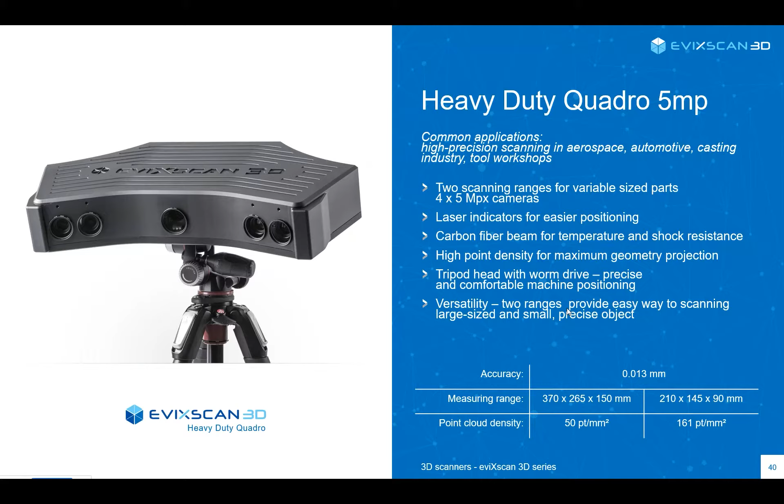So we can go from 370 by 265 by 150 to 210 by 145 by 90, with 50 points per millimeter squared and 161 points per millimeter squared. Really high density for high accuracy scanning, but also high field of view for fast scanning as well. A really versatile piece of equipment.

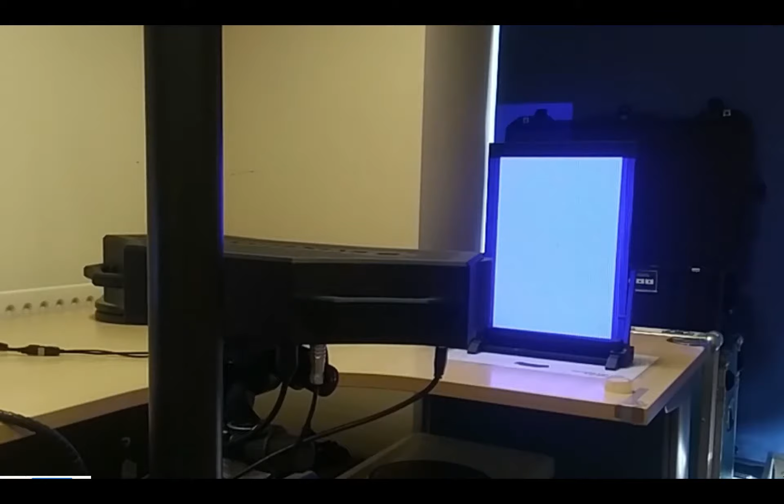Just having a quick look at the setup here, we're looking at the calibration process of the scanner, aligning this with the calibration plate. This is quite a simple process where the 2 laser lines are aligned and a number of shots are taken at different distances from the camera to create a measured bounding box within the environment. This allows for high accuracy scanning within the area of scanning. You can see here it's a very far field as well, so we have over 500 mil of distance from the scanner to the calibration window.

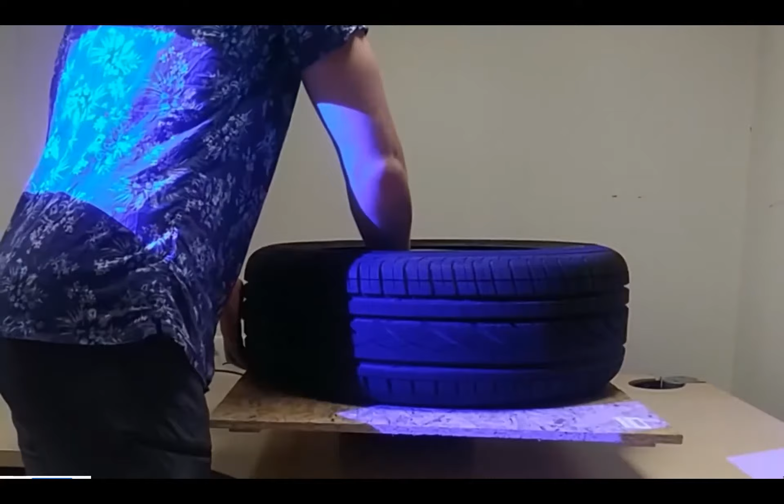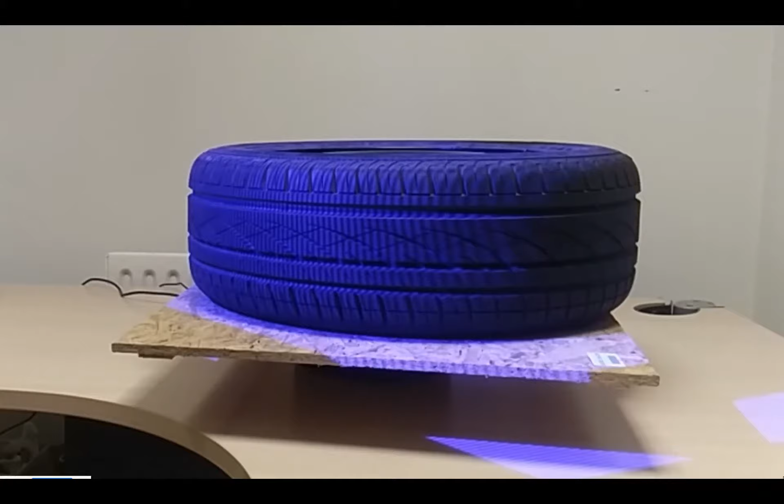So this is the object being scanned. We're scanning a Continental tire, as it's one of the main customers of the Evatronix scanners. We can see the tire mounted on the turntable on a board as a simple setup, and the scanning process taking place. It uses a fringe projection method of scanning where a barcode-like projection is done over the object, and that barcode is moved across. In this way, we can calibrate to capture all of the points in that field of view.

So once we have completed the scans, we need to take it into the Evatronix software. There are 10 steps on either side of the wheel here, so there'll be 2 different points of view taken into account, and then we will align that within the software and create a cohesive mesh.

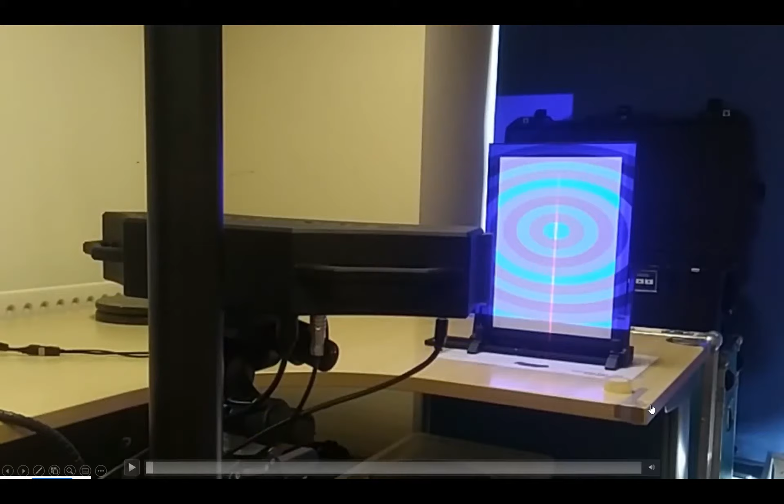Looking into the software now, we can see the 4 different tables for the different points of view that we used to scan this tire, and all the different meshes used to create this object. Each point of view, each snapshot, is aligned within the software using the aligning tools, and then we can convert this to a singular mesh.

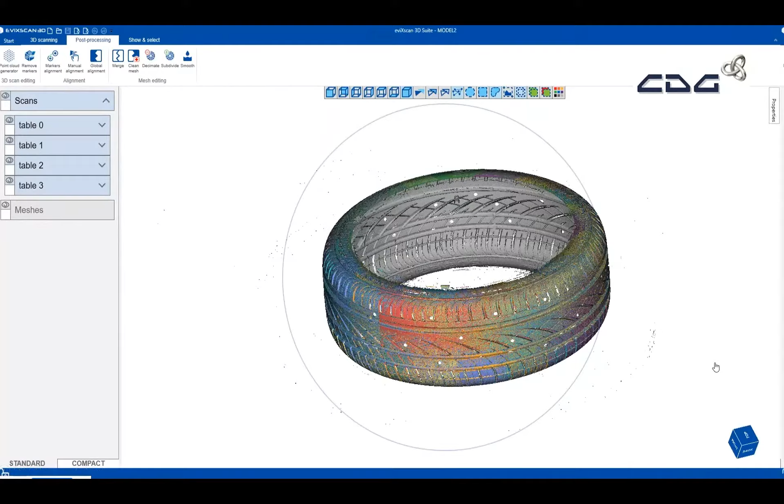Now looking at the merged object, we can see the high resolution of this scanner, having a look at the detail that we can capture within here. Really nice for reverse engineering of tire structures, tread analysis. All types of processes can be implemented with this type of setup.

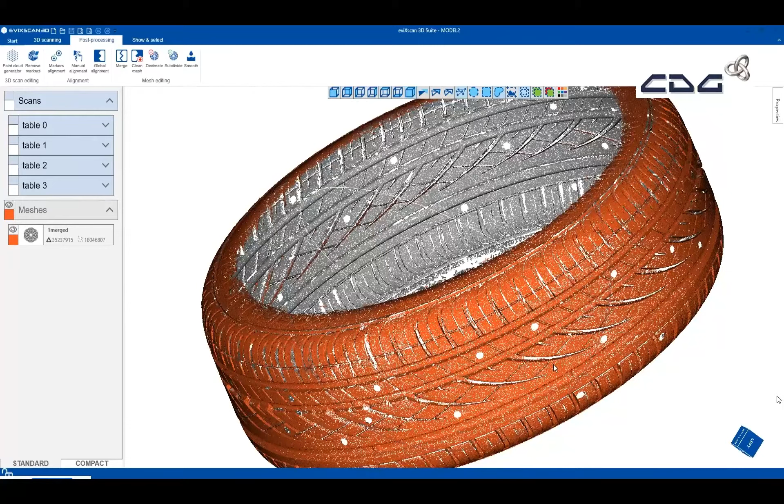Now looking at the eviXscan software, we can look at how we can automate this further, making it less user-based to set up, more automatic and easier to use.

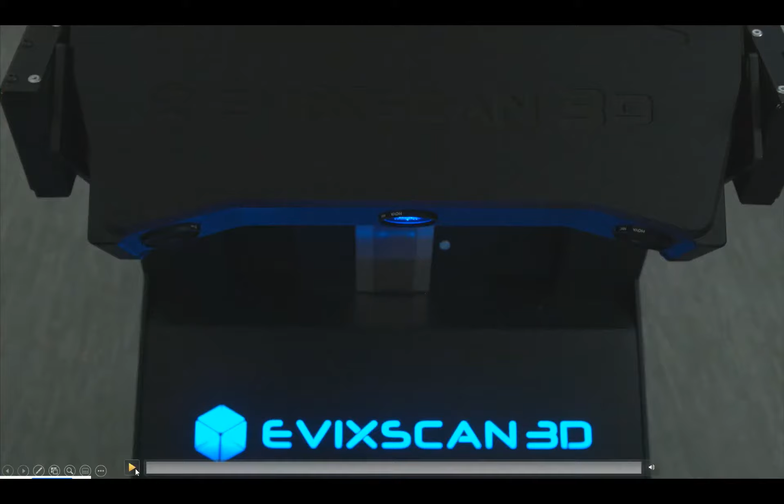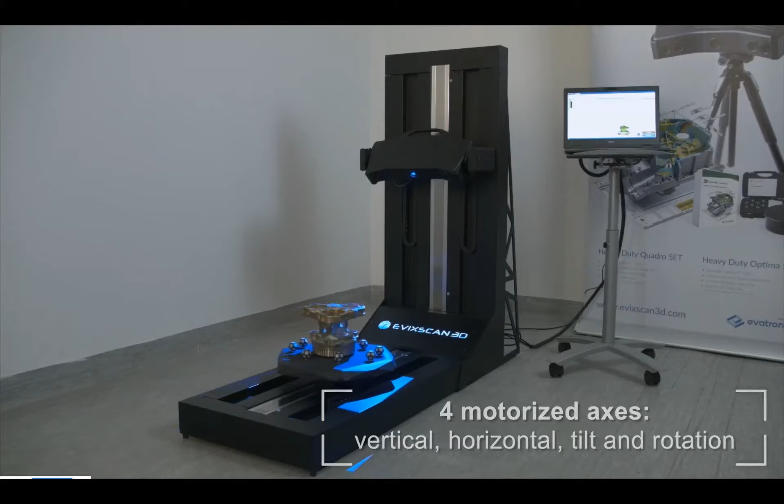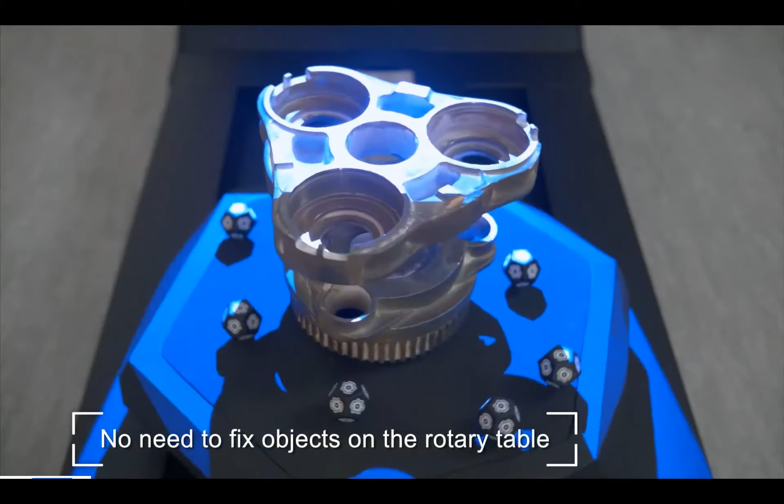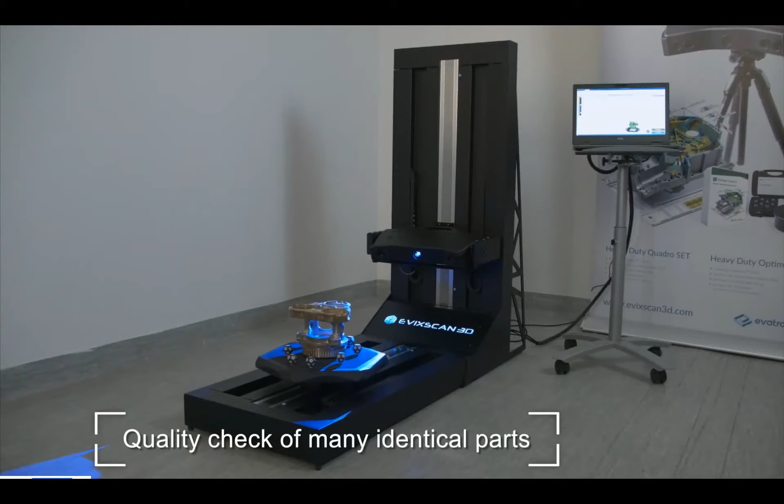Looking at a quick video demonstration here, we can see the Evatronix scanner setup, which uses a 4-axis setup connected to a laptop. The part is placed onto the turntable. We have auto calibration where we can place the calibration plate onto the turntable as well, making it a much faster process for calibration. We scan the part very easily at multiple different views, capturing as much data as we can from the part without human interaction, very much automating the process for quick and easy capture of the data. You can see here the software aligning the scans automatically whilst using this setup.

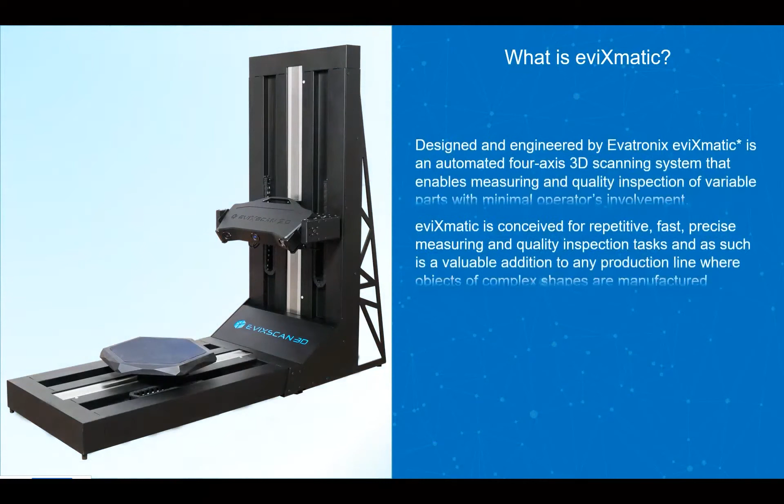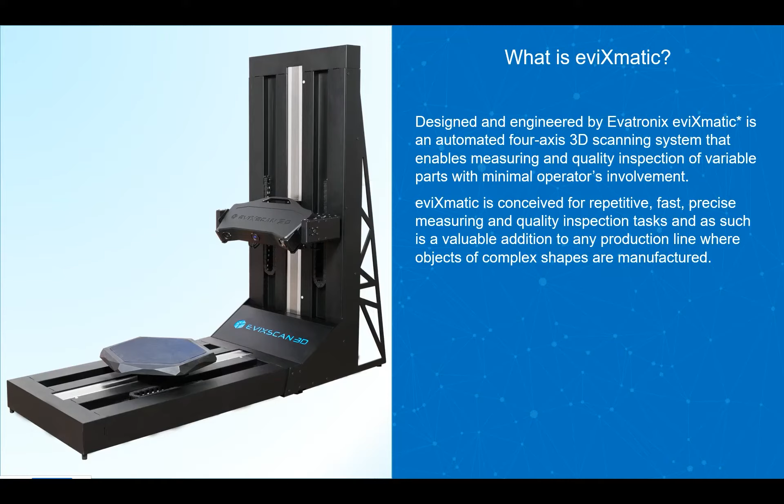So what is the eviXmatic? It is designed by Evatronix, a proprietary piece of hardware. It's a 4-axis 3D scanning system that enables measurement and quality inspection of variable parts with minimal operator involvement. It's very good for repeatability, it's fast, it's precise. It makes the inspection task much easier for a user to do, and it really makes the scanner work for you that much better.

It can be set up with the Quadro or the Optima. So in both ways, we can use the different fields of view, but also possibly use the Optima as a cost-saving exercise as well.

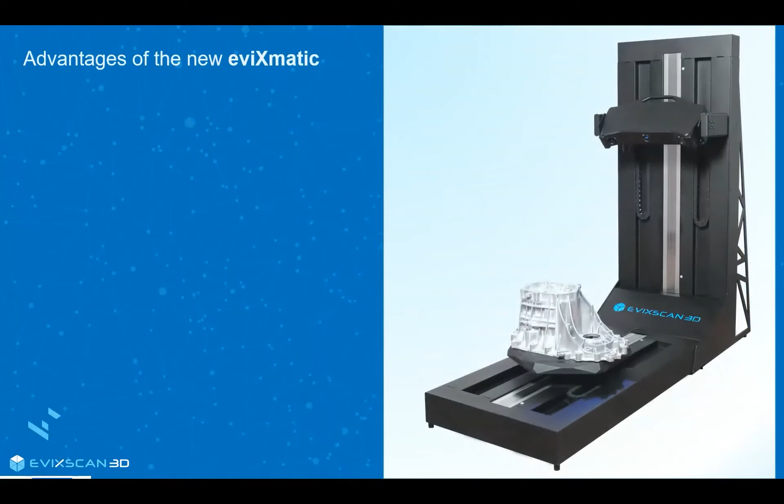The advantages of the eviXmatic are auto-calibration, which makes it a faster process for calibrating the scanner, making sure your measurements are accurate. There's also an automated scanning procedure, so setting up a procedure for scanning the part, with proprietary tools built into the Evatronix software.

The ability to define measurement sequences allows you to build that into an inspection program. With Control X, you can do simple measurements, pull that into the Geomagic Control X software, and automate the inspection report. There's also the possibility of simultaneous scanning of several small components, setting up multiple parts to capture maximum parts per scan, which is quick and easy to do.

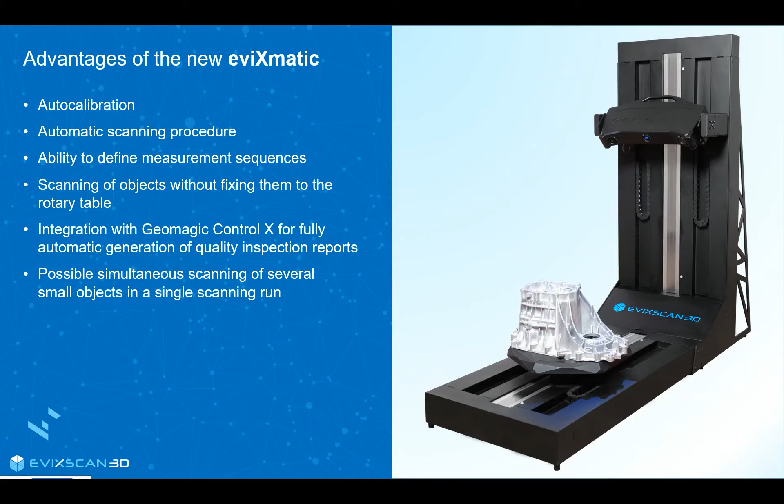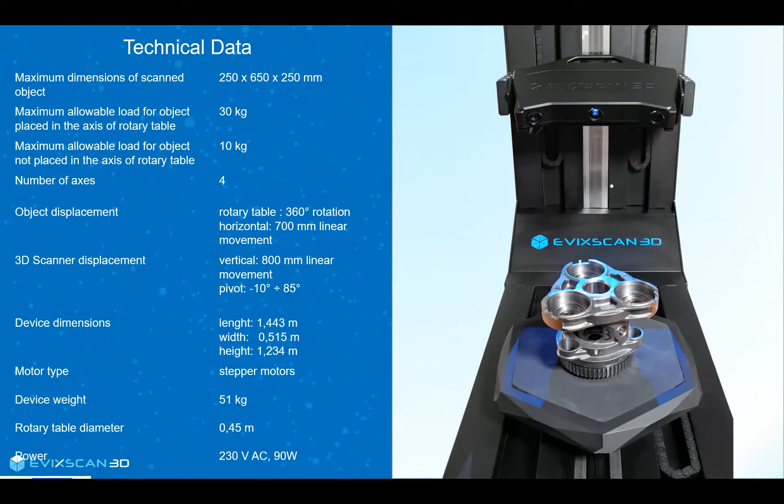The technical data of the Evatronix: maximum dimensions are 250 by 650 by 250, which is what you can fit onto that build envelope. It allows for 30 kilograms, or 10 kilograms if you don't want it on the turntable. It's got 4 axes, 360-degree rotation with 700 millimeter linear movement. Vertical is at 800 millimeters, minus 10 degrees to plus 85 degrees, so really getting full view of the part in question. It's a stepper motor type, and weighs about 51 kilograms, so really lightweight considering the scale of this system.

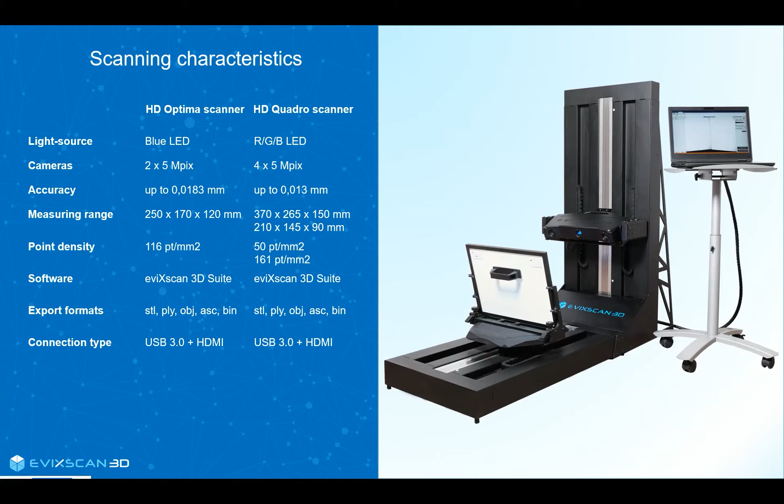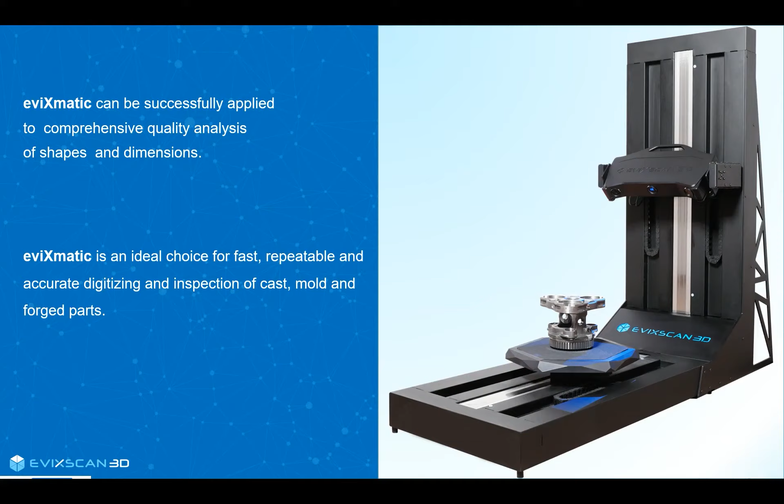The scanning characteristics: it can be set up with a blue LED or RGB LED system, using the Optima or the Quadro setup, allowing for quick and easy scanning of different fields of view. It can be successfully applied to comprehensive quality analysis and shape dimensions, making it an ideal choice for fast, repeatable, and accurate digitalization inspection of cast, mold, and forged parts.

Moving on, we're looking at how we can automate this process even further, using robots or cobots as a solution for scanning. Inspection using cobots and robots, using robot arms, makes it much easier to automate the scanning process within a production line. The precise position of robot arms allows for repeatability, and control of the workspace is much easier. Identification of position of objects in space is really easy as well with the software.

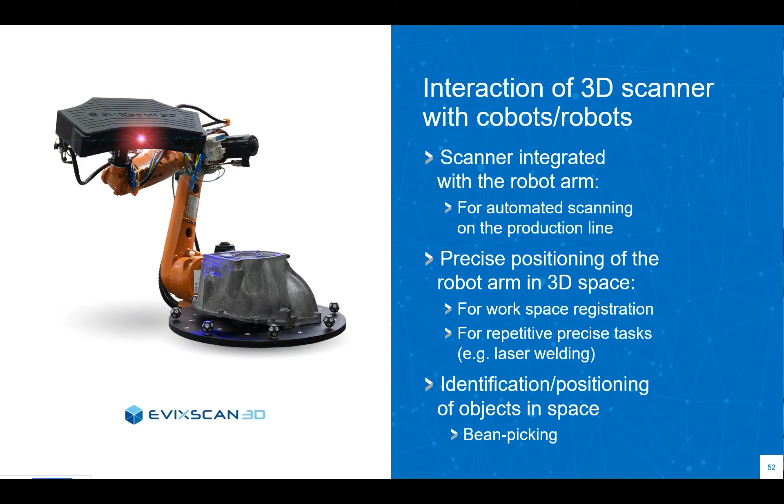So two solutions that can be used with a robot arm: scanning with the scanner on the robot arm, or having the part located on a robot arm. Just a quick video showing the two solutions. We have a KUKA robot arm here showing the scanning process in an inline inspection.

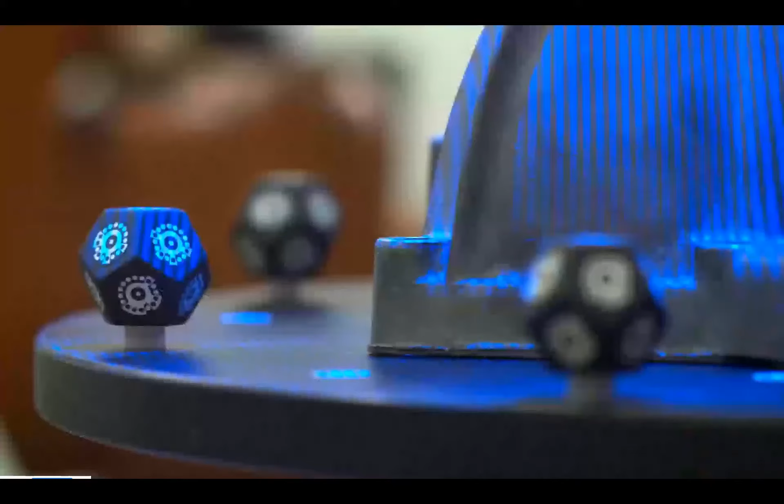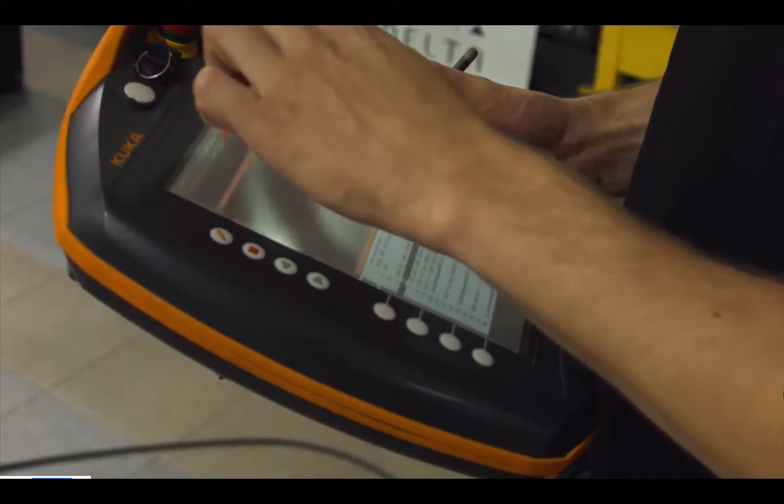You can see the scanning process taking place with the different positions of the scanner, using the target markers as a reference device for easier alignment of the scan data. You can see how quickly the scan can be built up and those measurements can be created. Using the KUKA system makes it much easier and more friendly to capture this information.

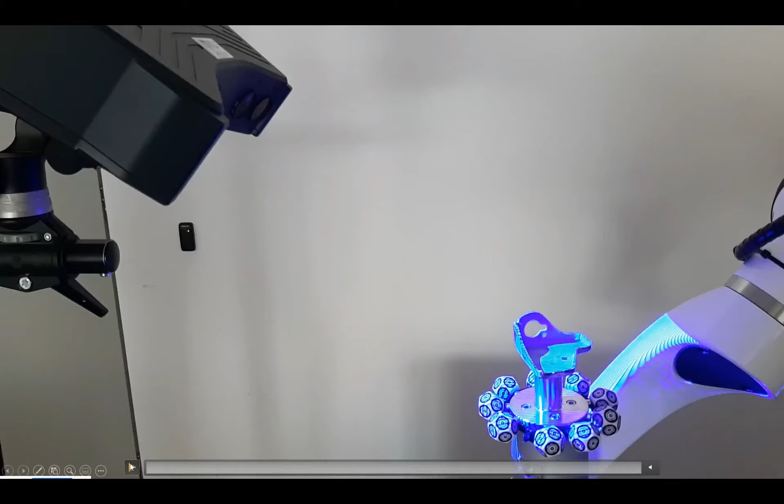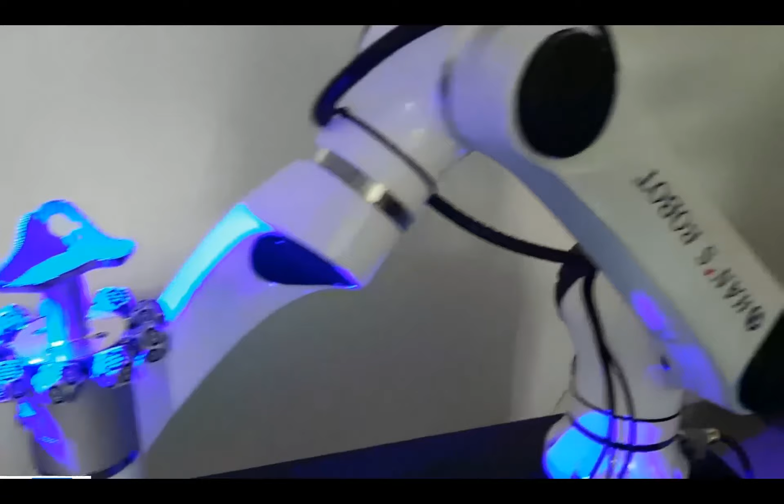Another solution would be if we had the part on a robot arm. This is using the Quadro system with the part on a robot arm, again using those index marks to allow for quick and easy alignment. The robot arm allows for positioning in the best field of view, and the scan taking place quite easily to capture that information.

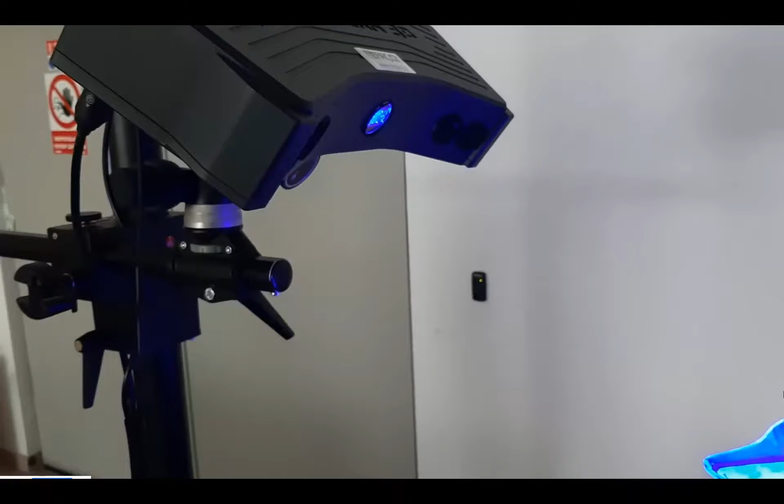In both scenarios, we're looking at making this process much faster, easier, and more repeatable for a particular procedure. We can help define what the necessity of your process is and give you advice on the best possible solution for that automation.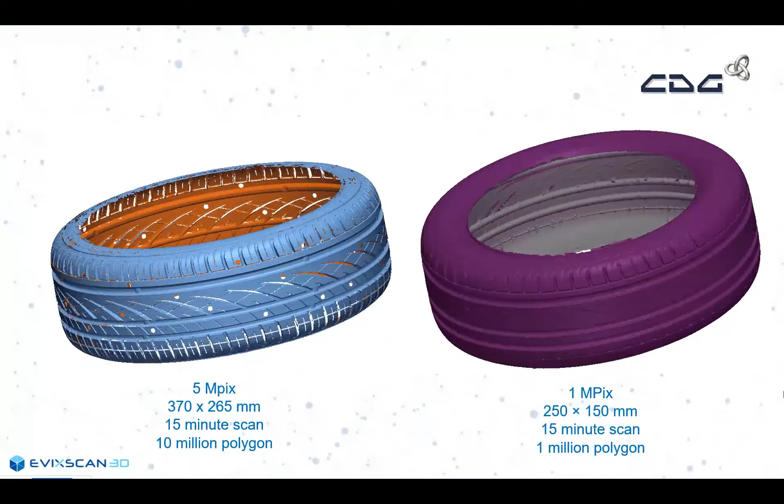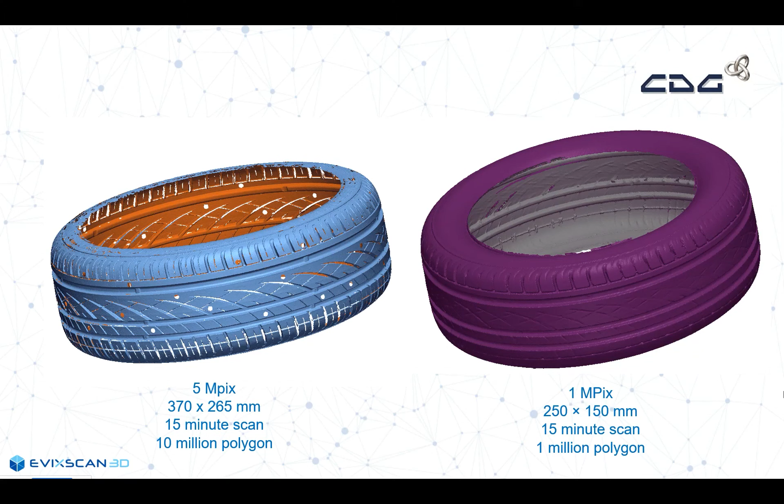Just a quick look at the comparison of the high-resolution Evixscan scanner compared to a low-resolution 3D scanner: 5 megapixels versus 1 megapixel, the Quadro versus a typical scanner that's out there right now. We can look at the 5 megapixel camera and see the resolution accuracy as a mesh versus the 1 megapixel camera. Higher field of view, but still much higher resolution with 10 million polygons, versus lower field of view, lower resolution, 1 million polygons, taking approximately the same time, but the accuracy and quality is better overall.

You can see right here the detail that we're capturing on a tire is amazing. It's really capturing all of the fine details that you could possibly want for reverse engineering or inspecting this type of part.